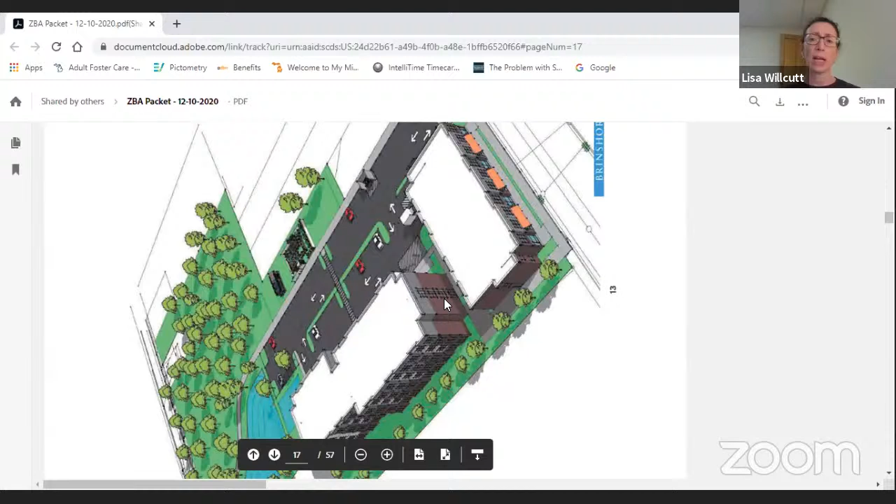I also have Jeff Swenarton with me. I don't know if there's anything I missed, Jeff, that you wanted to add — other than that, I think, unless there are questions.

No, Lisa, I think you did a great job. Obviously this project, as you've said a couple of times, has been previously approved for that variance, which is relatively innocuous. And obviously the project we're really proud of — it's going to be a terrific project.

And it does utilize a lot of green space. You mentioned the need for affordable housing in this community. The project, and it can't really go on Lake Street because of the flooding concerns.

We don't have them here, but yeah, we're asking for a minor use variance, and I think it meets all the requirements. And again, we also have site plan approval, which is terrific. And we're real close on this, but because we weren't able to get the tax credits, we had to let it expire.

But that's why we're back now, because it has to be exercised within 1 year. But we're just further along in the process. But none of the facts on the ground have changed, and this board approved the variance before, and there's only more reasons to do that now. So that's all I had.

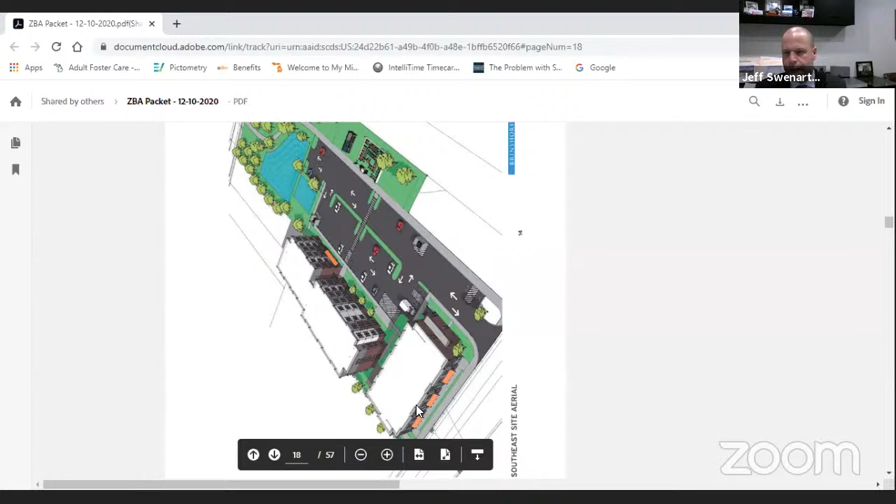Thank you. Do any of the board members have questions? This is Dick Skowski. I've got just a quick question on the surface parking. Is that drained to the basin or the pond that you have to the north there? Is that collected and handled in that manner, or is that surface runoff handled in a different direction?

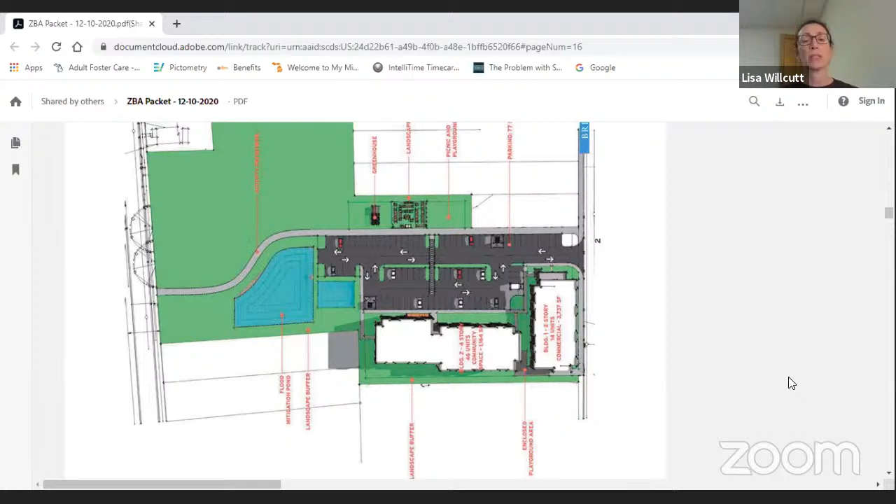No, it's handled by those mitigation ponds. That's what I thought. I claim to not be an expert on how the flow works, but that's what they're there for, in part. Yeah, I think that was the original concept that we saw about a year ago. So I think that was the purpose, and I'm glad to see that was incorporated again. It mitigates a lot of the problems that are attributed to the surrounding areas, not necessarily at that point, but others in the general vicinity. So thank you.

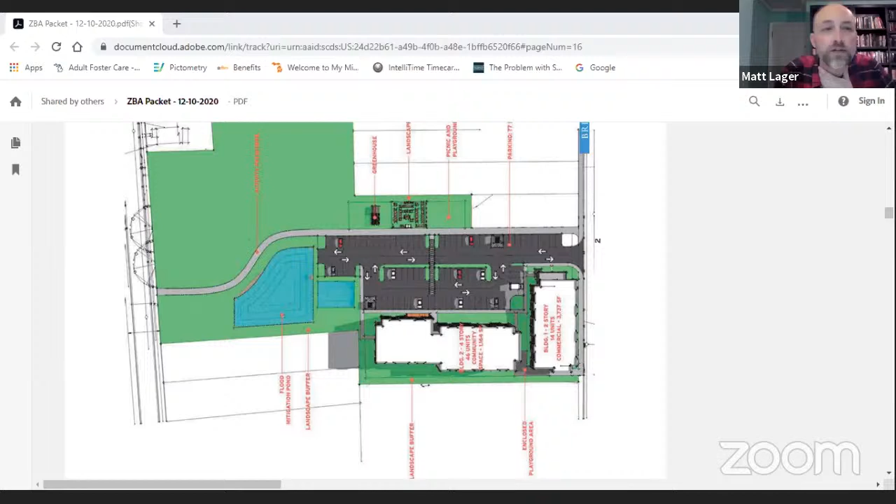Yes. Before we see if there are any public comments, Pete, does city staff have comments?

Thank you, yes I do have a few comments. We did get one email this afternoon from Mr. Stewart regarding this project. In addition to that, I do want to point out, just to kind of go back and look at the history of this site. There was an initial design proposed and a rezoning proposed with that, which came in early 2019.

I believe that was January of 2019. And that went to the Planning Commission, and the project still needed some refinement at that point. There was a lot of questions raised. The Planning Commission was a little unsettled about the number of undetermined items, and that rezoning was denied.

The project was then revamped and came to the Zoning Board of Appeals, because when it was revamped, it was determined that this one use variance for the ground floor residential was all that was needed for the project. And the project will have, as mentioned, a commercial daycare component. So it's not that there's no commercial, it's just there are residential units on the ground floor level. So that required the use variance, which was granted by the Zoning Board of Appeals in February of 2019.

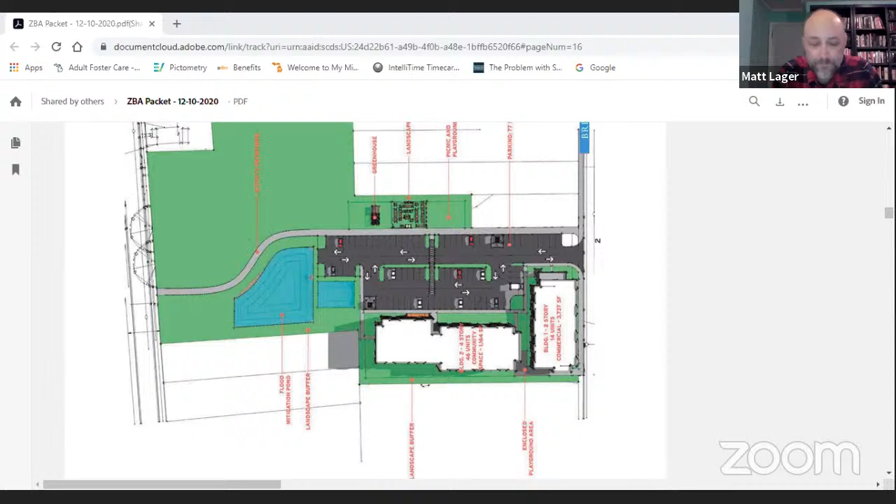All right, let's check and see if we've got any public comments. Public comments are queued. One moment, please.

My name is Sade Chambers. I am a resident in the city of Kalamazoo. I live on the east side of Kalamazoo, and I'm calling about public hearing E1 for Lake Street and Stockbridge Avenue.

I'm calling as a concerned resident to make sure that the natural features are taken into account for this area and the flooding, and that the residents' concerns that live on this side of town are heard, and that we respect their views as well while going forth with this project, to make sure all parties are heard and that we can have a clear direction of where we're trying to go, and to make sure the east side isn't forgotten about, and that they are protected during this process, and that the citizens that live in this area are heard.

As a concerned citizen, I just want to make sure that everyone's voices are heard, and that everyone is respected, and that we're making the right decisions on this request tonight. Thank you guys for your consideration, and I appreciate your time.

I am calling from 206 and 208 Lake Street. My name is Bhaskar, last name Pisapati. I own several homes in the neighborhood, and I'm opposed to putting the apartment complex in this area. Right behind my property is where this apartment complex is going to be going.

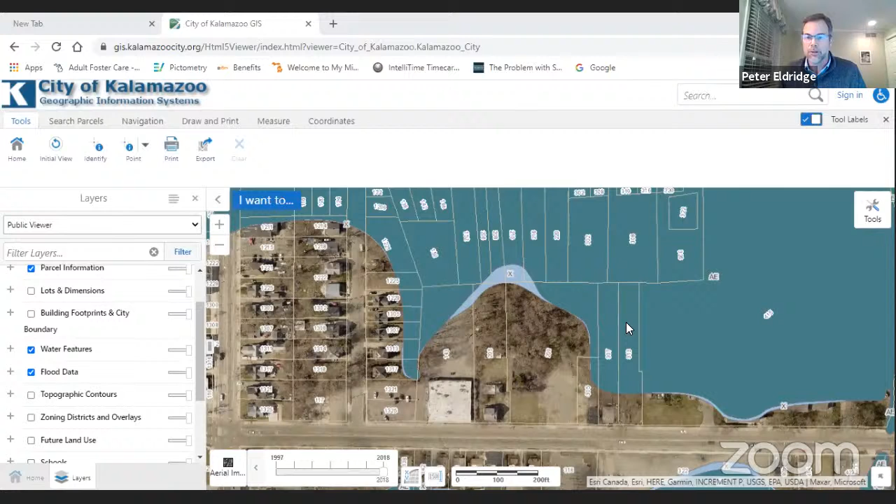I believe that part is outside, let me just pull up the map real quick here. I think the northern part may be in it, but the buildings themselves are outside. So here's the view showing the floodplain map. The footprint where the buildings are is outside the floodplain. Is everybody able to see that for the most part? And then the northern portion where the retention basins are, that's all clearly within the floodplain.

What is the year definition of floodplain? Are we talking 10-year or 100-year? It seems like it's pretty close to an arbitrary line. It's the 100-year floodplain we're talking about. That's correct, and that was taken off the FEMA maps and overlaid on our GIS aerial layer.

Do we know if those designations have been, those calculations have been altered for the phantom global warming that's going on? I'm joking, but so the 100-year flood, they say, is going to be every 50 years. So it seems like this project is really on the edge of actually one's belief about whether global warming is going to make this a 10-year floodplain. So the question is, are these floodplains based on models from the 1990s or from 2018?

Well, these are the FEMA maps. Many of them do date back to the 1990s. You could also inquire of the applicant if there's any additional information they can share as far as the floodplain concerns. So, I can say that David Anderson has watched this property. He goes there and sits and watches it to see when there's flooding in other parts of the city, and it has never flooded. It's right next to the city public utilities building, and those buildings do not flood. Thank you.

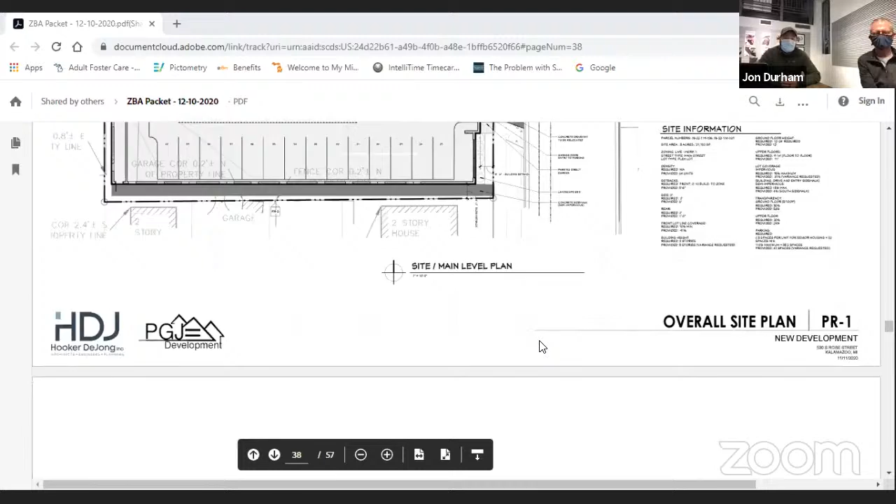One thing I really wanted to point out about this project, not only is it affordable, but being a senior project, it has a really important trickle effect in the community. This won't be 64 new residents to Kalamazoo. This will be 64 units that currently live in the neighborhood. So what ends up happening is those folks' homes will become untapped and available to more younger families. It actually really doubles the supply in a way, by opening up more affordable housing that's already in the neighborhood, by providing a place for these folks to move to. A lot of folks that are older don't want to maintain a home or can't maintain a home anymore, or may have certain disabilities. And that's really what this project is built for - it's for those folks. So we appreciate your consideration.

I don't know if you have anything you want to add, John.

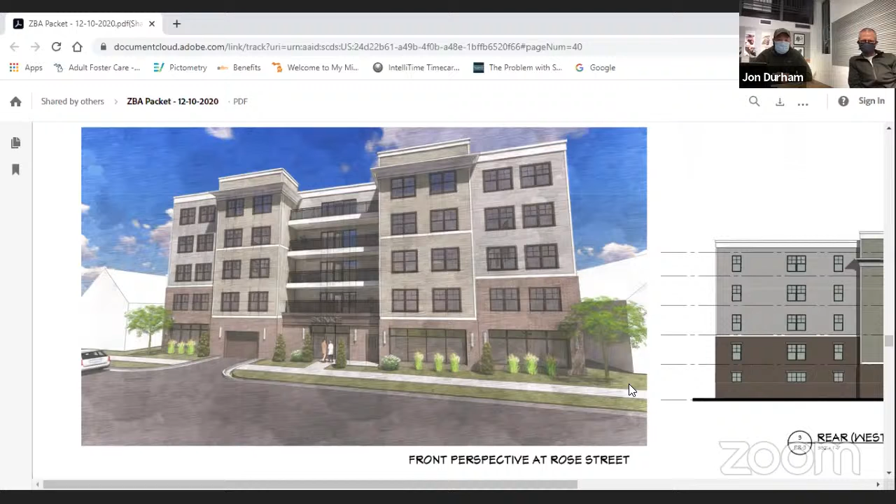We've worked on the entrance off of Rose Street and worked with Christina and group to make sure that we respect the community and don't make it look like just a blatant garage door into the parking, to make it be respectful with transparency into the building, and yet make it look like it is occupied, as far as again, respectful for the area. I think that's all we have.

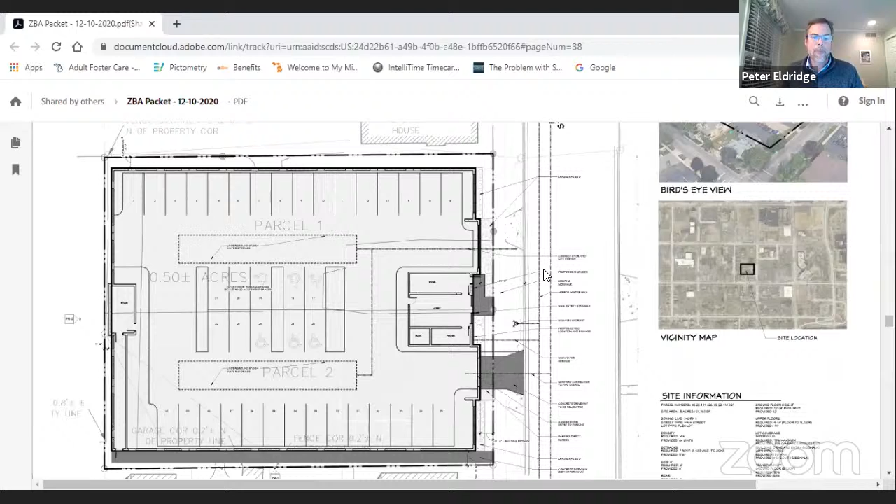So can you talk a little bit about the parking? Pete, if you could scroll back up so we could see that front facing - I guess I'm understanding that all the parking is enclosed under the building? That is correct. Okay, so that adds one of the 2 extra floors on the building?

That is correct, that adds one of the floors. The parking is a critical aspect of senior housing, in making it accessible and also safe and closed and close. It's all part of what really makes a successful senior development.

Yeah, and that's kind of the funny part. Previously the height wasn't an issue, but the density was. And now density is not the issue, height is. So before we achieved the variance for the density, and the height was all right. So essentially the development as a whole has not really changed from the original proposal. We're not bringing a new development - that's the original intent, and had we received tax credits this time, we would have been under construction with the building. So it's a matter of a zoning change, and now applying for a different variance that we had already cleared this hurdle before. So, thank you.

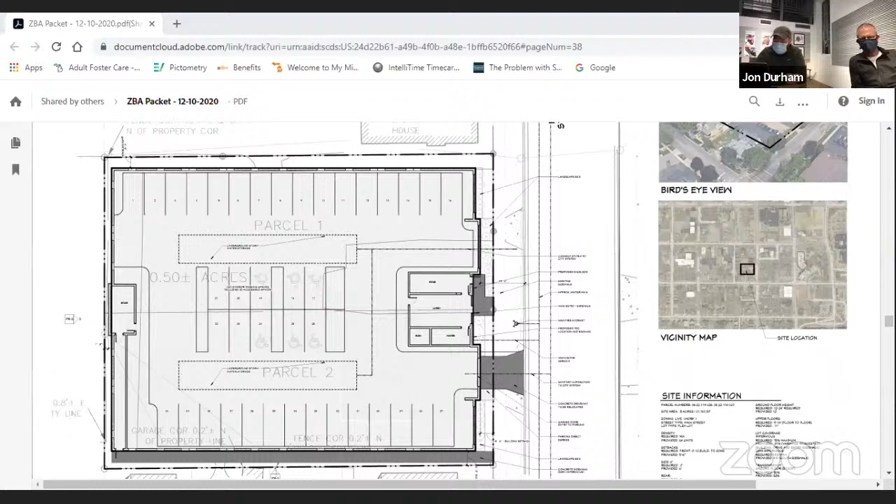Are there any additional questions from board members?

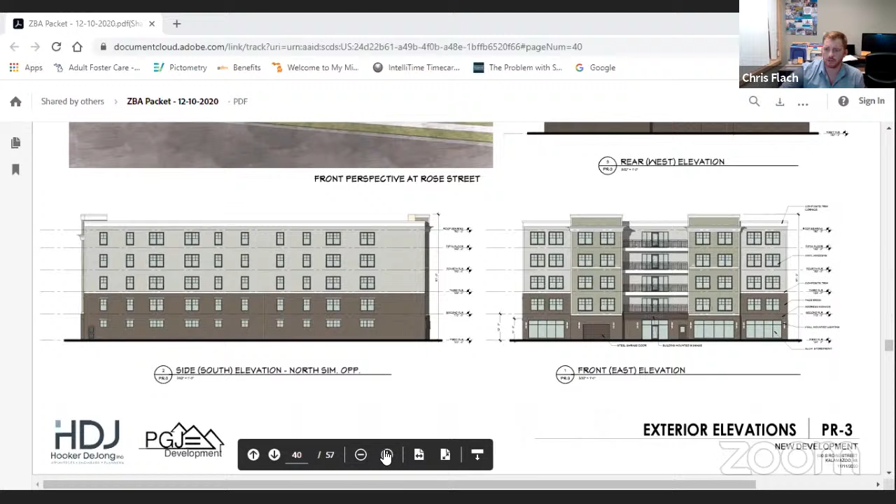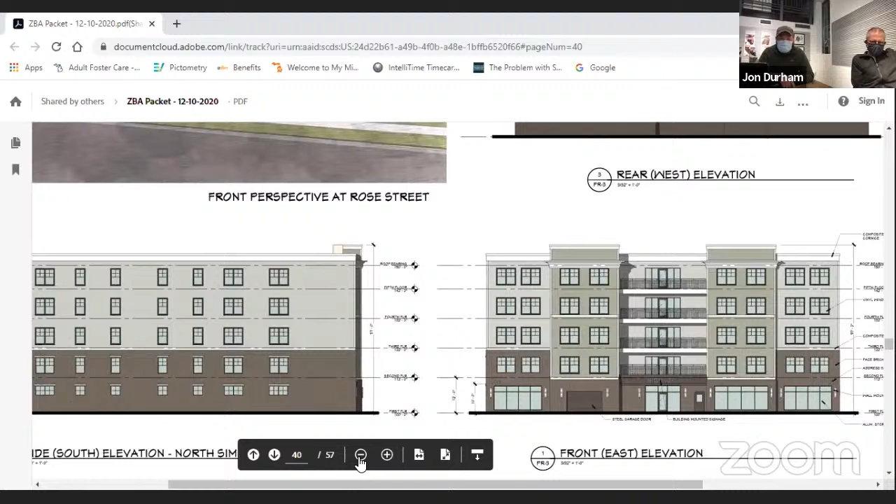The applicant mentioned there's already impervious soil there at the spot, but you just said the entire ground is impervious currently. Is that what you're saying? Yeah, currently the property, both lots are essentially a solid surface parking lot. There is a dirt area, I think it shows up on the survey, but essentially the entire lot is a solid paved parking lot today. So what you're saying is that if you were to build this project, your project really isn't adding any additional impervious soil to what's already there. Yeah, correct. All right, perfect. Okay.

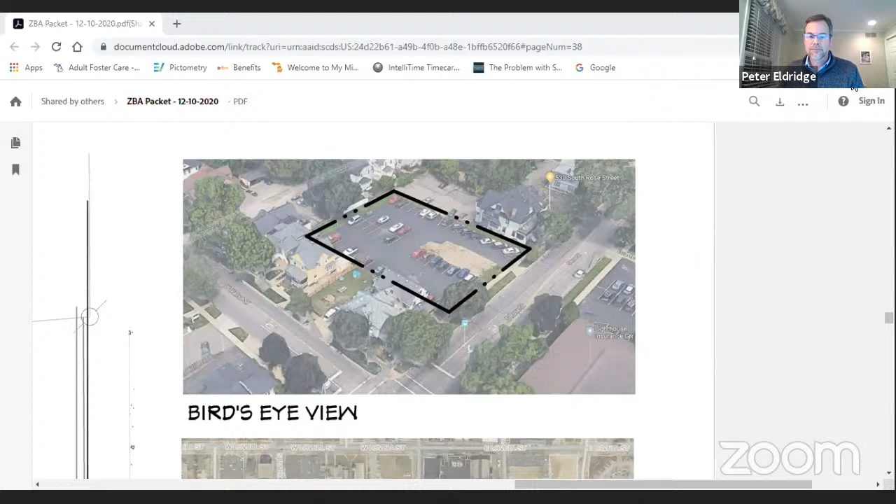Any additional questions before we see if there are public comments? When did you come back—this question is for the applicant—when did you originally get the variance, I guess, when were you here before? So it was December of last year.

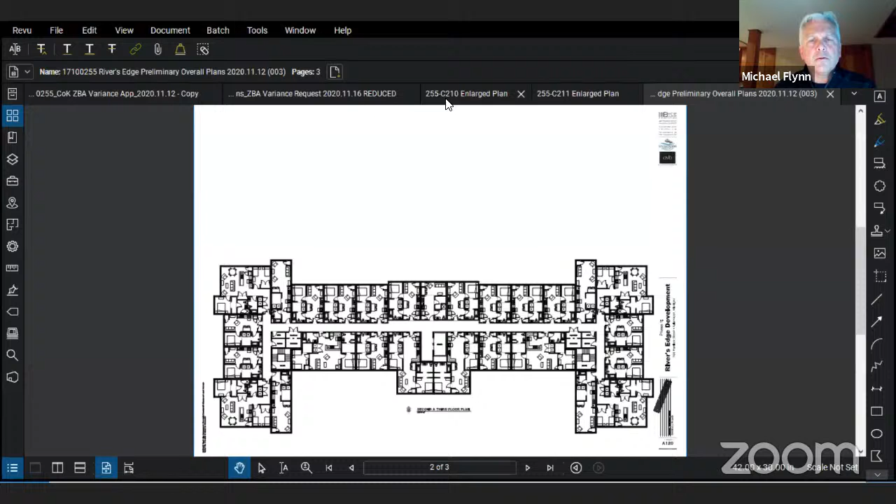Perfect. Okay, can you see that screen? Yep, we can see that. Okay.

I'll try to keep this brief for everybody's sake, I know it's been a long night for everybody. Just walking everybody through here, we have Harrison here and Gull here. Kalamazoo River is here, north is up.

What we have is a series of buildings: building A, B, this is building C here, and we have a building D on an adjacent lot. The concept is to have 111 apartments here, affordable apartments, and 111 here. Building C is the leasing building, along with tenant amenities as far as fitness and gathering.

This area here constitutes an outdoor patio area for residents for outdoor grilling, gazebos, picnics, and then we have a green park area here, which also allows us to take care of our stormwater management issues as well as floodwater control issues associated with being this close to the Kalamazoo River.

We are adjacent to the Kalamazoo River Valley Trail pathway, you can see that coming through here. It's a wonderful parkway, there's some historic, iconic buildings left behind, some outlooks, picnic pavilions. We really want to provide our green space, park space up to there to really create a nice buffer.

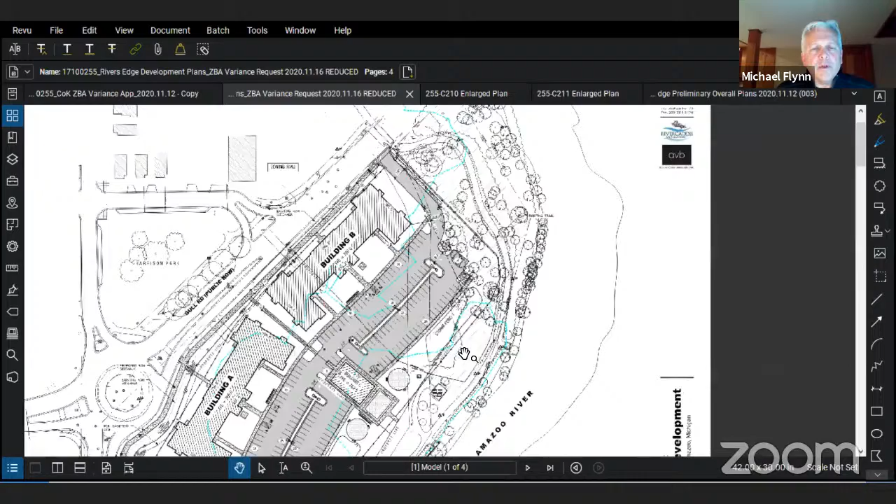Between this area, the public right of way with the trailway and our parking, and the buildings here. These are two 4-story buildings at this location, and then we have a 2-story building down at this area here. Across from us is MacKenzie's and the co-op.

The three variances that we're asking for: the first one is a use variance for the first floor residential. You can see that our buildings hug Harrison and Gull, which is a fairly heavy traffic road into the city, and we also have a tremendous amount of frontage, 280 linear feet of buildings here and here. You can also see the curvilinear shape of the street going around the roundabout.

And then in this area here, let me get to the zoning maps, if I can get to those. Here we are. So this is the current zoning. At this point, one of the things we've been trying to do, Pete, maybe you can help me through this, or Brian, I know you're on as well.

This is current zoning and this is future zoning. We designed the site plan so it met both, basically meeting the current zoning requirements it's under now, while also working with the city to make sure it meets future zoning requirements, or that the variances hold through as they go through that process.

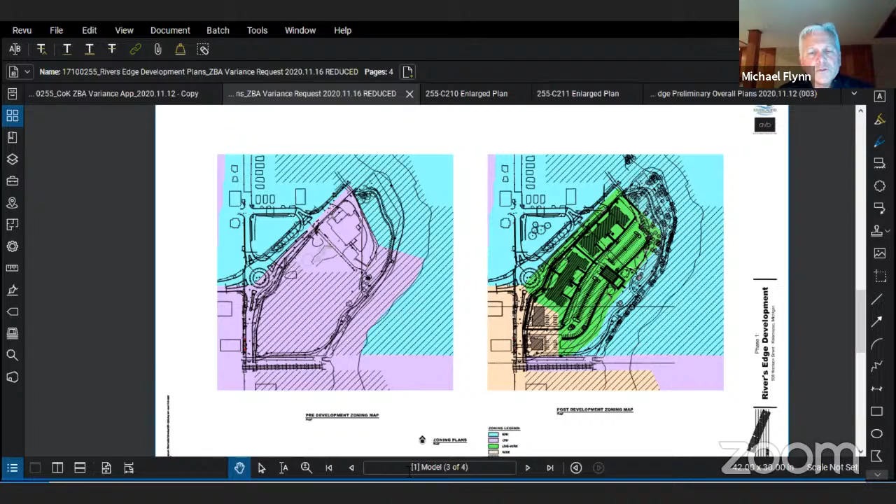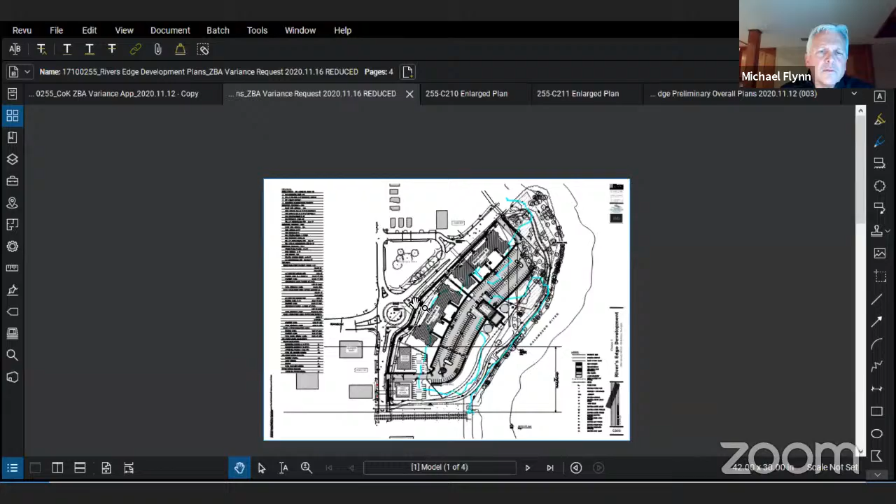The third variance we're requesting is another dimensional one, having to do with the setback from the street. If I can get into this drawing here, this illustrates the variance we're trying for. You can see we have a rectilinear building and a curvilinear street.

When the roundabout was put in, the sidewalk was pulled off the curb line for protection of pedestrians. You can see the difficulty of fitting a square peg into a round hole, if you will, to meet the requirements of that setback.

If you look at the property line here, following the roundabout and then lining back up with the street - and right where the property changes, this is a current building here, but the property line jogs back out. So we have some difficulty meeting those requirements with the curve of the property line down here and the jog of the property line at building B. We've done our best to move the buildings and meet the intent of the zoning requirement, pushing them as far forward as possible in both instances.

Part of the hardship here is that one of the requirements MSHDA will have for us is a railroad setback of 300 feet for the property. We also have the flood plain here, which is another constraint on the project.

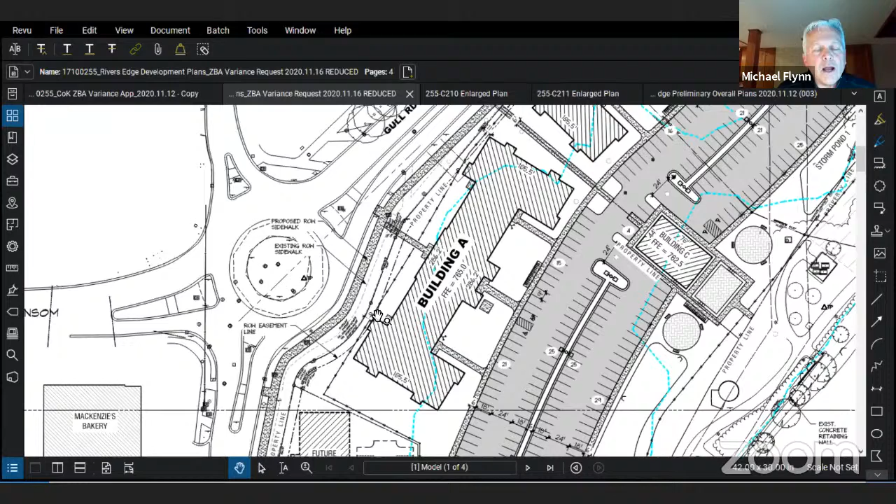The railroad and the existing driveway really crowd the buildings in at this point, resulting in this modified H shape on the legs of these buildings, with bump outs at the ends. We've brought in the edge of these buildings within that 0 to 10 range. Where we are out of compliance is where we have the jogs back in, creating mini courtyards along that long facade.

We've tried very hard to give that facade some articulation, so it's not a long, flat plane or mass. We're within compliance at these portions here, but out of compliance when we have that slight jog or step back into the building.

We feel it's also appropriate given the size and mass of the buildings to pull those back a little from the street. The first floor of these buildings will be about 2 to 3 feet above ambient grade, which will help give a sense of privacy and security for residents on that floor, and also elevate the building a little bit.

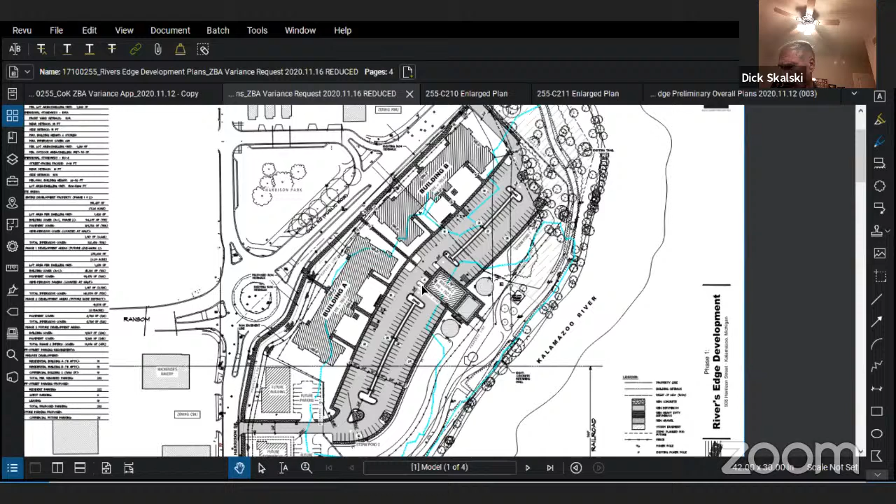Thanks, Mike, it was interesting to see. Oh sorry, go ahead Brian. No, you go ahead, I had a question for Mike but I don't want to interrupt you.

I was just going to mention on the minimum lot area per dwelling unit, the constraints on this property having to do with the floodplain, the tight nature of the site, and getting the amount of parking required in here. Most of that southern portion, as Mike mentioned, is for floodplain mitigation. So we've got a lot of obstacles on this property in our request for that variance on dwelling unit density. Also considering that the ordinance is likely to change and that won't be a requirement anymore in the future.

Thanks, Brian. Yeah, thanks for hitting those, I did miss those. Thanks for picking up on that.

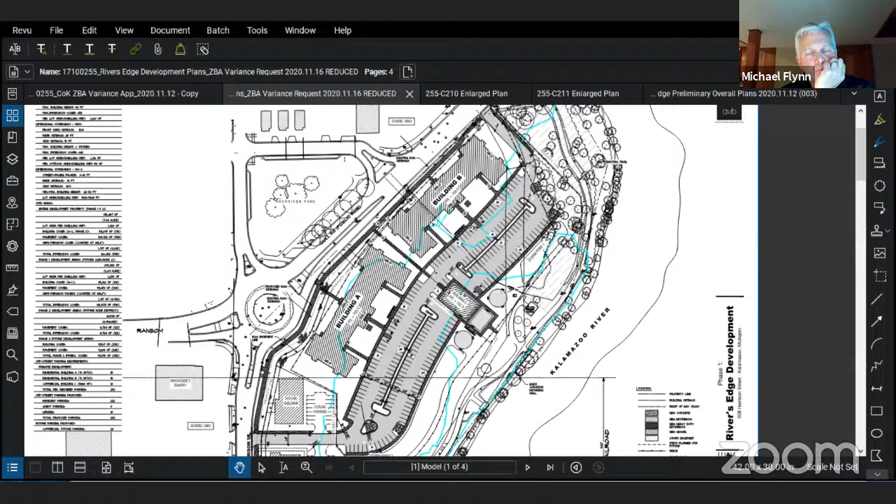That was my question, whether potential future zoning had the same density requirement, but it sounds like it doesn't. That's our understanding. Yes, it'll be Live Work 2, and our understanding is that has no density requirement. And that is correct.

All right, thanks. Board members, are there questions? Real quick, so as far as the setback requirements, when you originally designed this space, did it not have a roundabout there? No, the roundabout had been there.

At one point, we had - part of the evolution of the project - and I will point out that in a previous rendition of this site, these very similar variances had been granted for this project, albeit slightly smaller because we didn't have this site at that point. So to answer your question directly, the roundabout was there.

The issue of creating a curvilinear building to meet that can really be cost prohibitive, trying to take a structure that wants to be at right angles, square and plumb, and get that to form the shape of the property line. So there's a little bit of difficulty and some hardship in shaping that building to that curve.

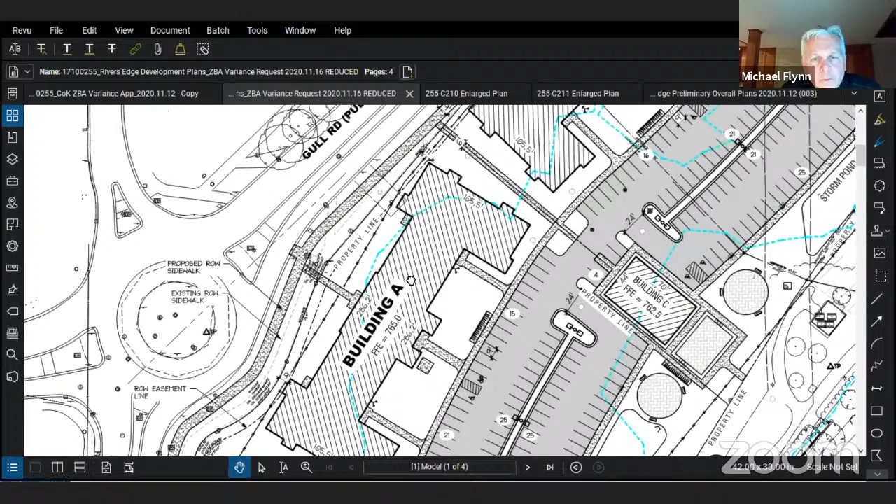But we think with the scale of this building, the size and length of it, from both an urban planning standpoint and architecture, that's actually going to be a pleasing effect. And that's why we would ask for the variance here - for the mass of the building, we believe it will achieve the intent of the zoning requirement, keeping that building up close and creating that urban edge.

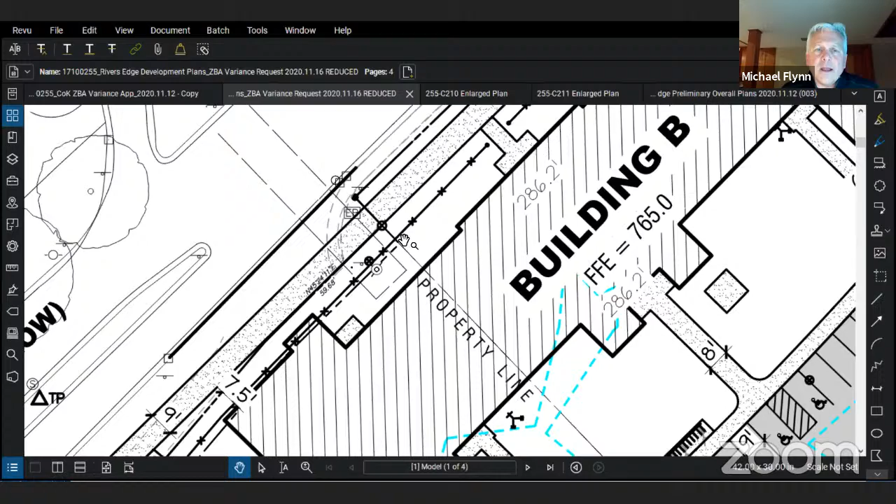And then with this building, building B, let me get a little closer in here if everybody can see that we have a property line coming here at this point, and then there's actually a jog in the property line that happens. Again, with this instance, you can see where the property line jumps over the sidewalk, and that would create a problem, obviously.

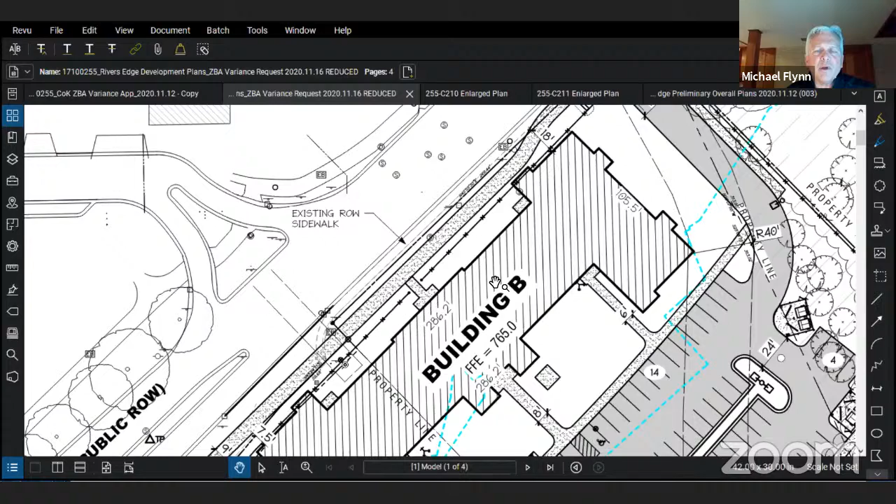So we kept this as tight as we could. It's a little easier on building B to do that because Gull Road planes out and becomes a straight line that we've met up with, keeping our building facade and face parallel with that. All right, got it, thank you.

Thank you. All right, Pete? I saw you had a memo in here. Would you like to make staff comments?

Yes, I have a few staff comments. I hope most of that was articulated well in the memo, and I know multiple variances for a particular project gets a little confusing. As the board's seen, there's a theme tonight with a number of residentially oriented projects for affordable housing, and this third one is also applying for low-income housing tax credits in February of 2021. So because of that timing, all these things need to be worked out prior, as far as the general site plan and any special approvals needed.

To go through the major points briefly: with the first variance, the use variance from the ground floor level, this project does have some commercial buildings along the cul-de-sac, plus the residential buildings along Gull Road, making it a mixed-use project. Some residential units are on the ground floor, but only in the two buildings along Gull Road. So we run into the situation where the spirit of the ordinance is met with the mixed use, but we have residential units on the ground floor with no leeway, so we end up needing this use variance.

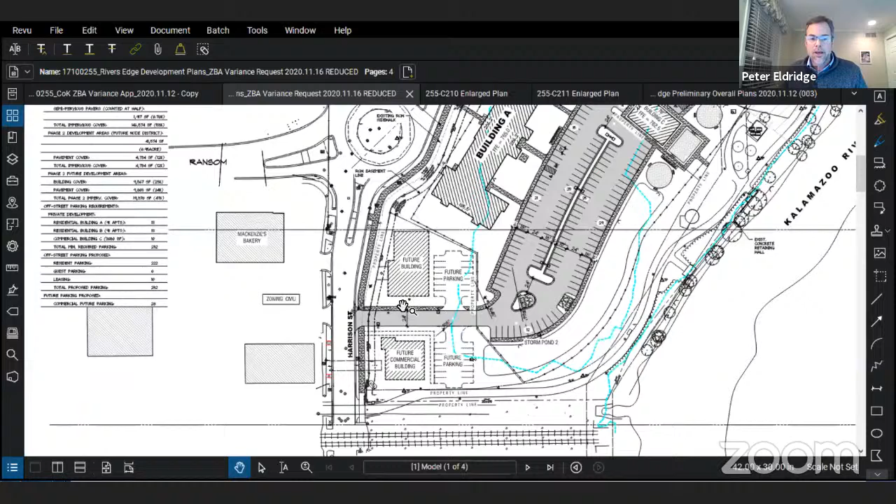As Mr. Flynn mentioned, there'll also be an area rezoned to node, closer to where the commercial buildings are shown near the roundabout. So they are basically in agreement with city staff and the future land use map, and there is a game plan for rezoning to achieve parallel with that future land use map.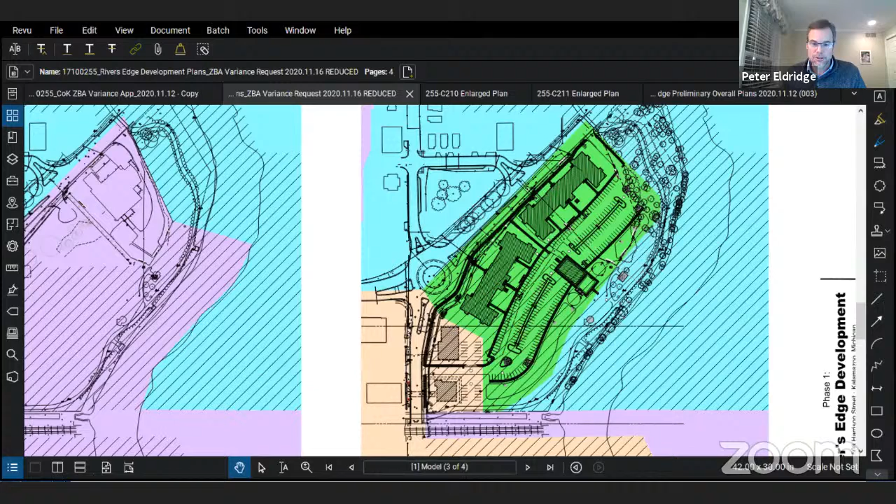On the second item, dealing with lot area per dwelling unit - again we've run across this on these other projects tonight. We're looking at more affordable housing, which means in many cases smaller square footage. So you have more units, but not necessarily a bigger building, and that density increase with smaller units isn't handled very well by the ordinance. Planning staff has looked closely at this and thinks this is a reasonable proposal to provide a variety of affordability levels. Again, when this is rezoned to Live Work 2, that lot area per dwelling unit requirement would go away.

The third request is the 0 to 10 foot build-to line along the frontage of the property. I thought Mr. Flynn did an excellent job explaining that. We always use the words practical difficulty, unnecessary hardship - when you have a front property line that looks like this property's, it is a practical difficulty.

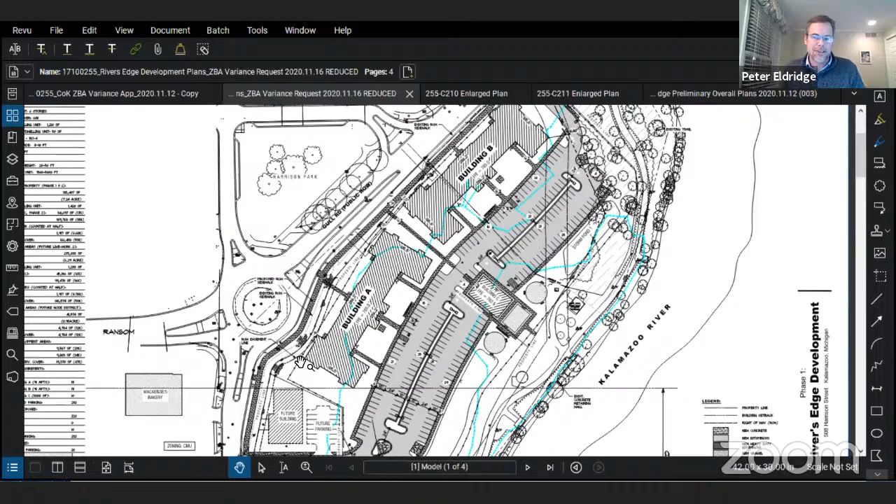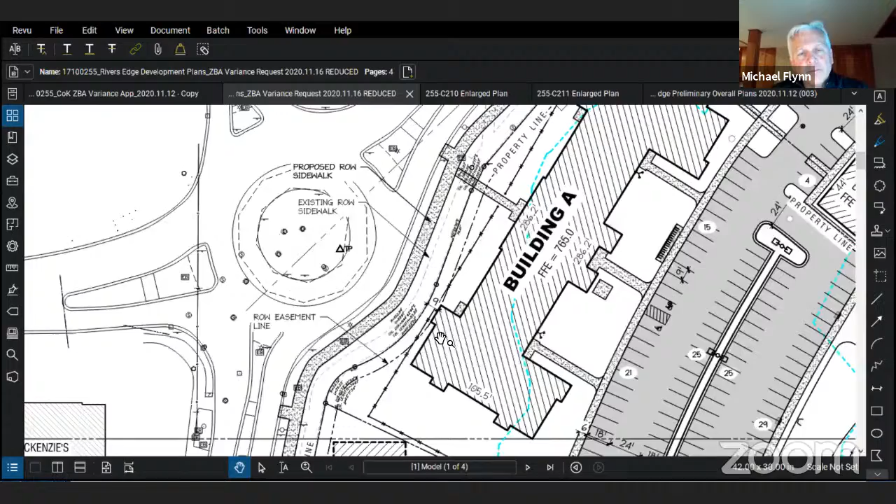Then to add on to that, we have a utility easement - I forget if it's 15 feet or 10 feet wide - for the water line that's in the front yard. It's right here, and it even pushes us back a little. That easement pushes the building away from that property line, adding to the distance we're asking for. So you're not just positioning the building clear of the water line, you're positioning it clear of the entire width of the easement that protects that water line.

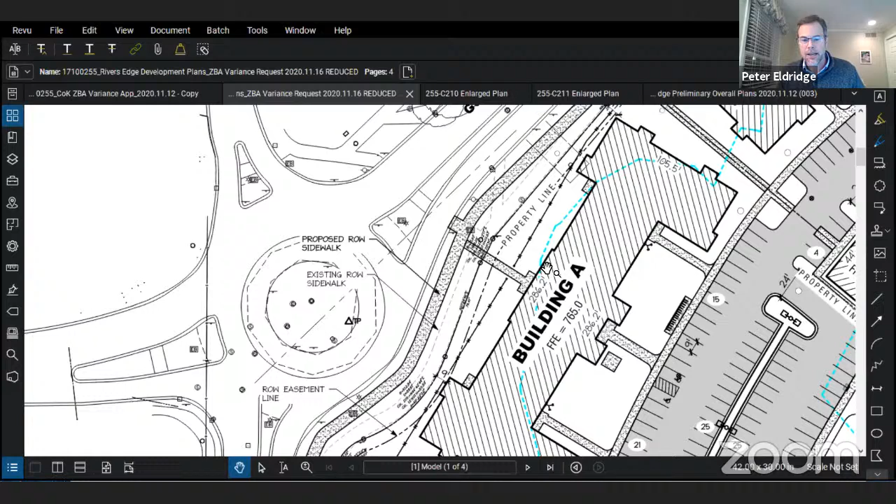In the end, the extensions on the ends of the building are as close as 5 feet from the front property line and as far away as 30 feet. So they've ended up with this range when you look at the overall facade and the distance from the front property line. They've worked very closely with staff to position these buildings to achieve the objective of building-forward design and the walkable nature being promoted in this area of the city. So staff is supportive of that third variance as well.

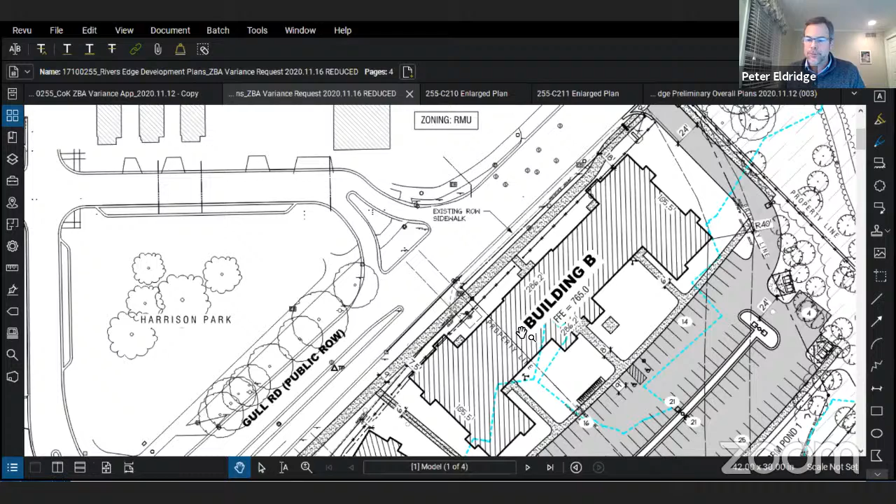Thank you. Thank you. Are there any public comments? No public comments at this time. All right.

If there's no further questions, can we have a motion on the finding of fact?

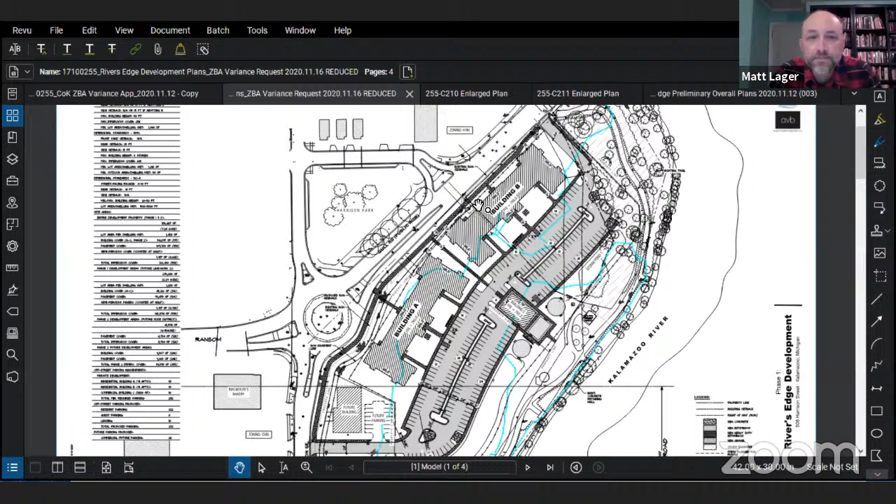Mr. Chair, I move that the finding of fact for location 508 Harrison Street and 660 Gull Road shall include all information included in the notice of public hearing dated November 25th of 2020. 17 notices of public hearing were sent and 0 responses were received and are part of the record. A public hearing was held before the board and public comments were accepted. In addition to the information and documents contained in the agenda packet staff provided for this request, the Zoning Board of Appeals received no additional documents regarding this case.

Kevin McGraw of River's Edge Development is requesting a use variance and 2-dimensional variances. Mr. Flynn spoke on behalf of the project from an architectural firm. Specifically, there's going to be 22 affordable housing units. There will be 3 buildings, an outdoor patio, and a large green space that also acts as a buffer for the Kalamazoo Valley Trail. The site plan meets prior and future zoning requirements.